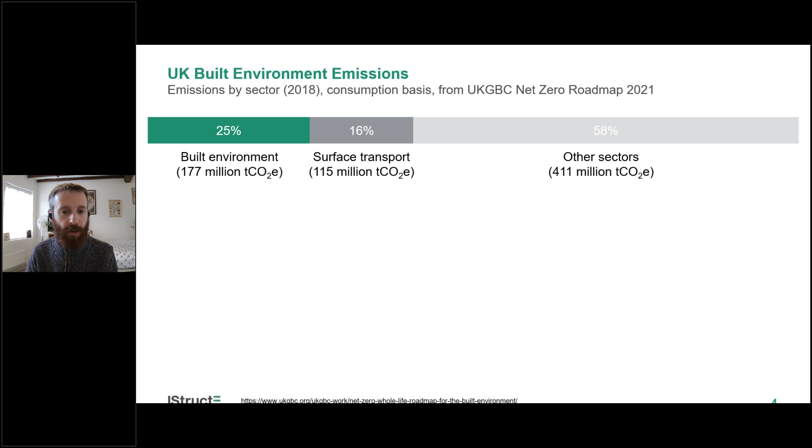So it's about 180 million tonnes of carbon per year in the UK due to the built environment. And that gets split down into a couple of things. We have this term whole life carbon, which is used to describe the total emissions throughout the entire life of a building or an asset, everything from constructing it in the first place through its life cycle, operating it, maintaining it, and so on. And at the end of life, when we come to demolish or deconstruct it. And whole life carbon is roughly split into two parts.

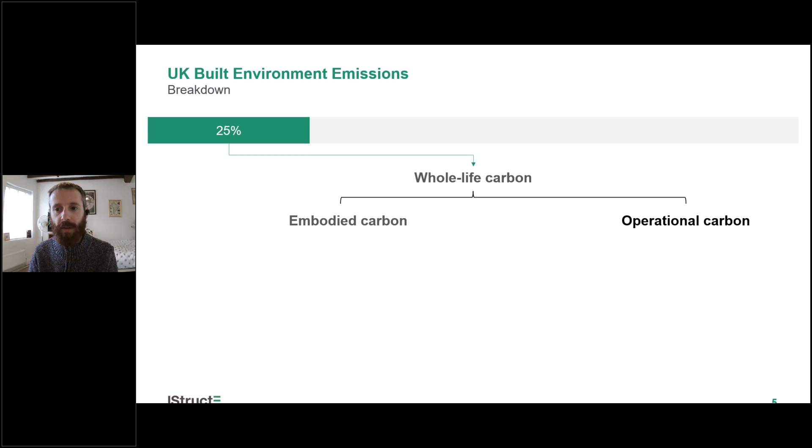So we have embodied carbon, which is obviously the focus of this talk, and then we have this other half, which is operational carbon, which has been the focus of a lot of conversations around carbon in the past. Now, the general rule of thumb is embodied carbon is anything that you can touch, and operational carbon is anything that is related to anything that you can turn on or off.

So the chair that you're sat on right now, there are embodied carbon emissions associated with that chair. When the various materials were produced, there were greenhouse gas emissions emitted at that point in time. It was probably transported at some point, maybe between different factories, with the padding being made somewhere and then transported somewhere else to be assembled into a full chair, and then eventually transported to the position that you're sat in right now. There are emissions related to all of that.

There's some maintenance that goes on through its life. Maybe less obvious with a chair, but if you take the window closest to you, that window might stay there for a long time, but might need certain parts replacing over its life cycle. And then at the end of life of either of those things, there are emissions from taking that away. And we use the term embodied carbon because effectively that chair or that window is the embodiment of those emissions.

So it's not embedded, because there's no carbon dioxide embedded within it. These are emissions that were emitted during its construction and so on, but it's the embodiment, so we have embodied carbon. And then operational carbon is the part that's left. And like I said, that's been the focus of the conversation for quite a long time now.

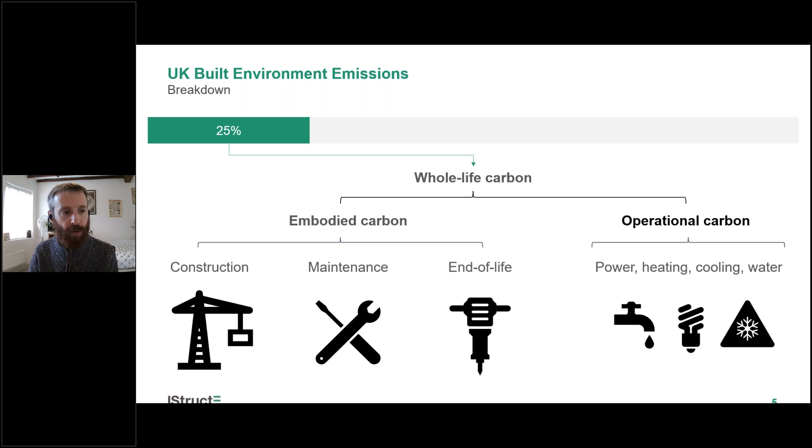In the UK, for a typical mid-rise residential block, an office, or a school that meets current building regulations, the numbers stack up roughly in these sorts of proportions. About a third of the whole life carbon emissions of a building such as that will be due to the embodied carbon, and two thirds will be the operational carbon.

And it just so happens that if you look at the UK as a whole, you get similar numbers. Out of our built environment emissions in this country, about a third are due to constructing new buildings, new stuff, and two thirds are on heating and powering our existing building stock. So it's the same rule of thumb, one third, two thirds. But that's all to do with what's typical today.

And of course, where things are going looks more like this second graph. We've got a huge drive towards decarbonising our electricity grid in the UK. We've got regulation meaning that we're going to move away from gas pretty quickly. We've already got buildings being built with air source heat pumps instead, so electric only heating. And as we design buildings that are low energy, and we see a lot of exemplars of these out there at the moment, all of this squeezes the operational carbon piece, but it doesn't do very much to the embodied carbon side of things.

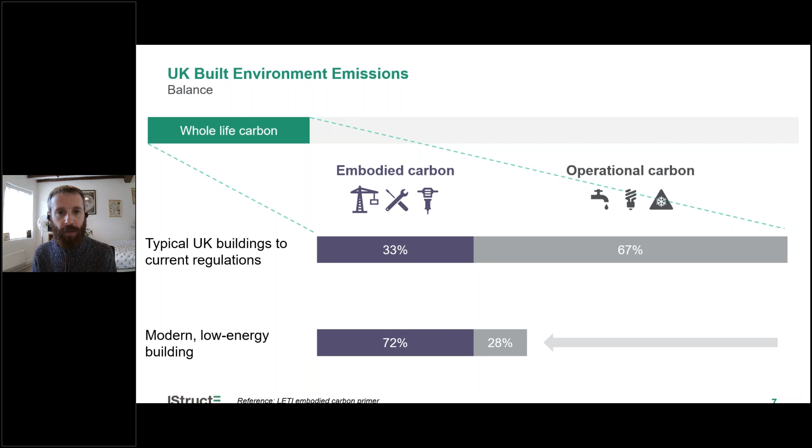The decarbonisation of the grid is the exception to that, and it does make a bit of a difference to embodied carbon, but the biggest offenders in terms of embodied carbon have other emissions that have nothing to do with electricity. When you make concrete, there's a chemical reaction, and that's actually about half of the emissions due to concrete. So we're moving towards a world where we have a much bigger problem with the embodied carbon piece than what's left with the operational carbon piece.

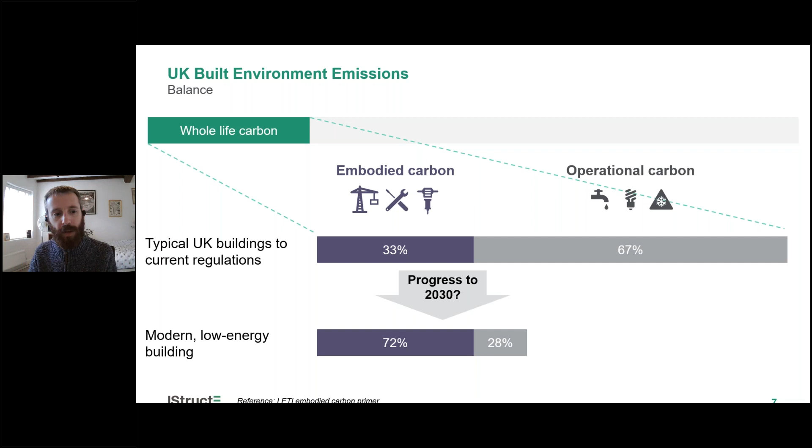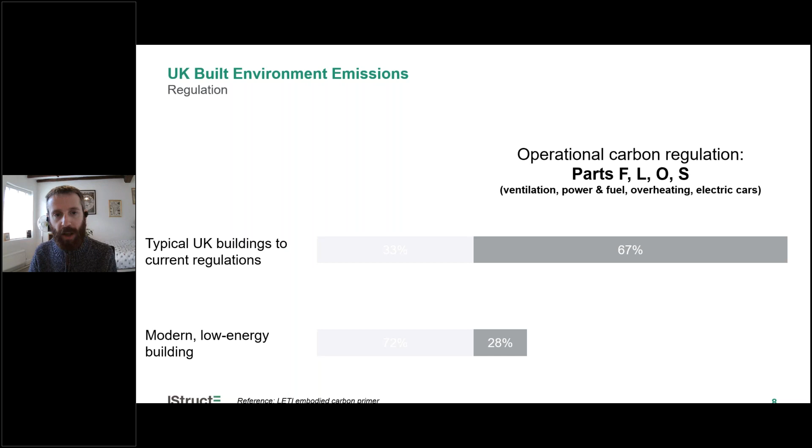At the moment, we expect that by the end of this decade, by 2030, we would hope to be in the position shown at the bottom, at least in terms of the grey bar, with operational carbon. The point of all of this is that at the moment we have all these different parts of the building regulations dealing with operational carbon and operational energy use. This is what's helping to drive some of those efficiencies. And we have nothing at all to deal with the other side of the graph, the embodied carbon. So it's completely unregulated, and it's currently the minority, although it's still a pretty big chunk.

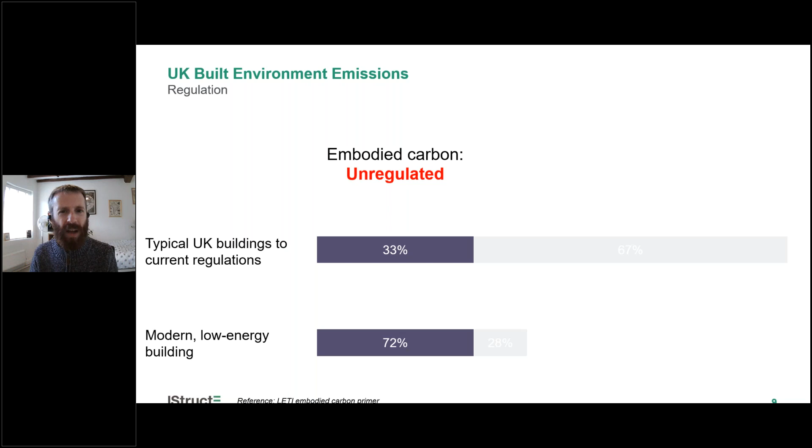But by the end of this decade, it means that the majority of the emissions on new buildings will be unregulated. You can put as much concrete in the ground as you want. You can dig a hole to the center of the earth and fill it with concrete to build your foundations for your project. And as long as it doesn't cut through any underground tubes or anything like that, that would be fine. That's clearly not quite okay. Hence me talking to you today.

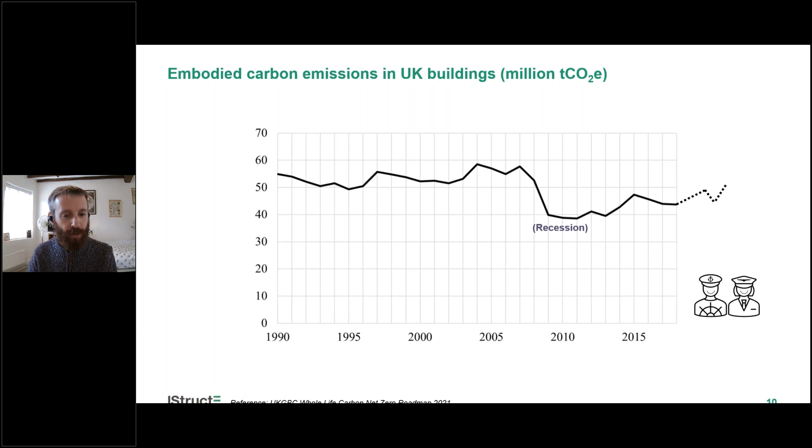So we're around the 50 million tonnes of carbon mark in the UK. And for comparison, that's more than aviation and shipping combined in this country. So we've got these regulations out there and these policy ideas behind aviation, for example. We've got the snappily named Jet Zero, but we have nothing to do with this 50 million tonne of carbon elephant in the room called embodied carbon.

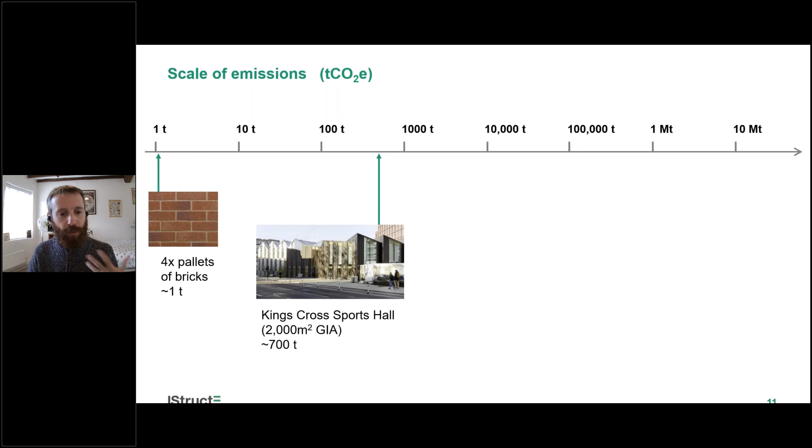The other thing I'd like to share in terms of numbers is just to talk through the scale of emissions for a few different things. I'm not going to talk through all of these, but I think it's worth sharing these examples one at a time to give you a feeling of what the numbers look like at different scales. When you're down at the materials level, you're talking in terms of tons of carbon. Once you're up at a building level, it's between the hundreds and maybe tens of thousands of tons, depending on the size. A domestic family property is obviously going to be less than 100 tons.

But by the time you get to a city centre flagship development, you're going to be into the tens of thousands, if not more. You have whole developers' portfolios that get you into the hundreds of thousands of tons, and probably the biggest buildings out there are in the hundreds of thousands of tons, if not more. In fact, from a rough back of fag packet calc, the Burj Khalifa is probably beyond 500,000 tons of carbon. And then at the top end of this scale, you've got the UK. So this is just to give you a sort of scale of where that all fits.

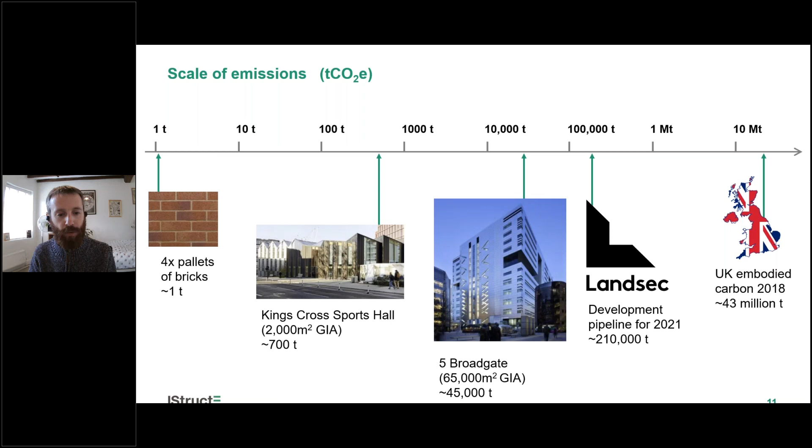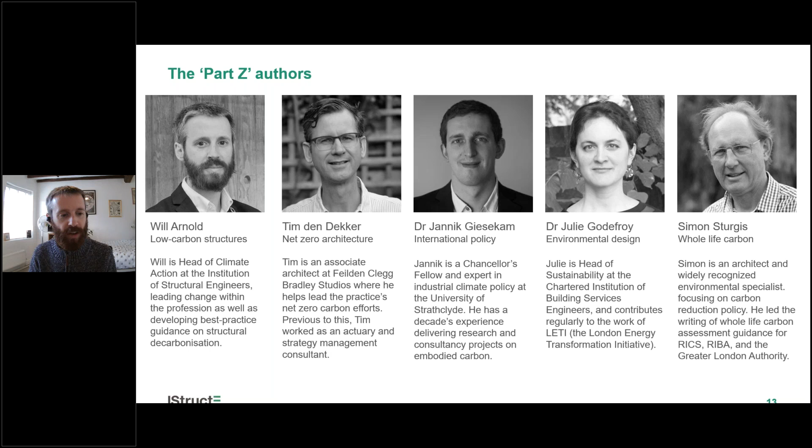So our plan was that if you want to get the industry talking about regulating embodied carbon, then maybe it'd be useful to give a working prototype of what it looks like to allow people to start to unpick it and ask questions and comments. Obviously, the building regs is broken down into parts A, B, C, D, E, etc. Part L is for energy. We were going to name it Part O, but then we discovered that was already being worked on by the Department for Levelling Up, so we just skipped to the end of the alphabet.

So it's called Part Z purely for simplicity, that no one else is going to ride to Part Z in the near term, we hope. And in the same way that the other parts have this sort of wording in Schedule 1 of the regulations, we wrote out the Part Z wording as it would sit in the regulation in our view. And it's got these two parts.

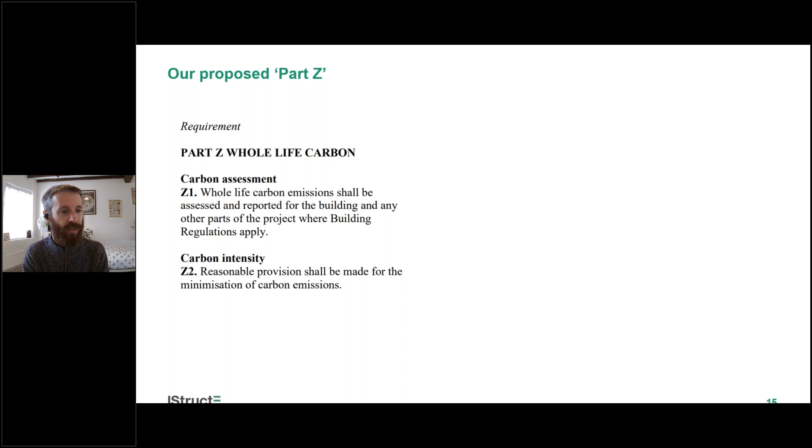So Part Z1 is basically to say that whole life carbon emissions need to be assessed and reported for the building and for any other parts of the project that the building regs apply. And then Part 2, and the wording's a bit funny, but that's because it's aligned with the Part L wording on this. Part 2 basically says that there needs to be limits on those carbon emissions, on the embodied carbon emissions. So the two parts, just to recap that, the first bit is to talk about assessing and reporting, and the second part is about limiting.

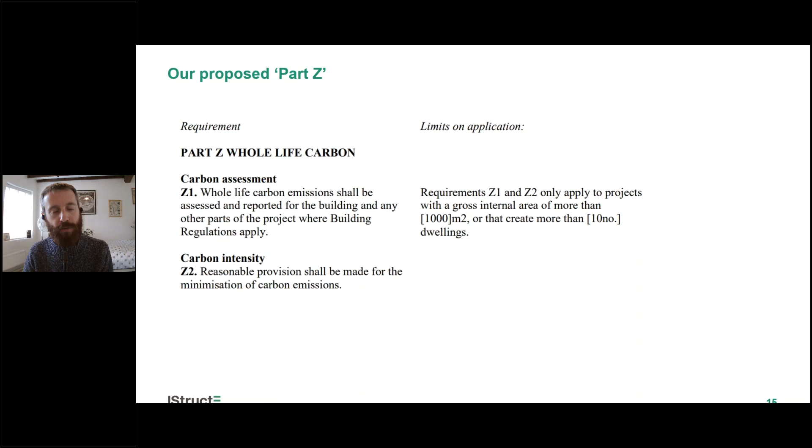And I'll show you in a second, but they, in our view, are two different things and would come in at two different times. We've also suggested in Part Z that this would only apply to major projects. So projects with a GIA of more than 1,000 square meters, or that create more than 10 dwellings. So if you're working on a small housing development, or just a single property, or just a scout hall or something like that, this wouldn't apply to you in the first instance. And it's only applying on the scale of things where you're getting into the territory where you're doing the more onerous demands of Part L, the Future Homes Standard, and so on and so forth.

And then our suggestion was that the first part of Part Z, the reporting side of things, kicks in as of next year. You can see obviously that first date's getting quite close now, and we will need to update our proposal at some point soon because it doesn't seem that's going to happen. And we've suggested that housing follows suit maybe a couple of years later. And the only reason for that is that in our experience as authors, the non-domestic market is probably slightly ahead of the curve on this topic.

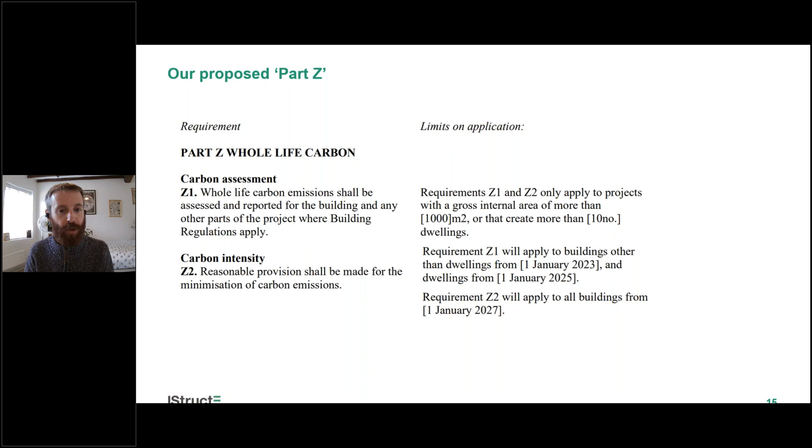And we then said you'd collect data for a couple of years, use it to assess where you think benchmarks should sit, and you'd then set the limits based on that a couple of years later. So it wouldn't be until 2027 that limits would come in this proposal. And to supplement all of that, in the way that all parts do, we then pulled together the proposed document. It's not an approved document, it's not been approved yet, but our industry proposed document, and that would explain to you how to go about doing this.

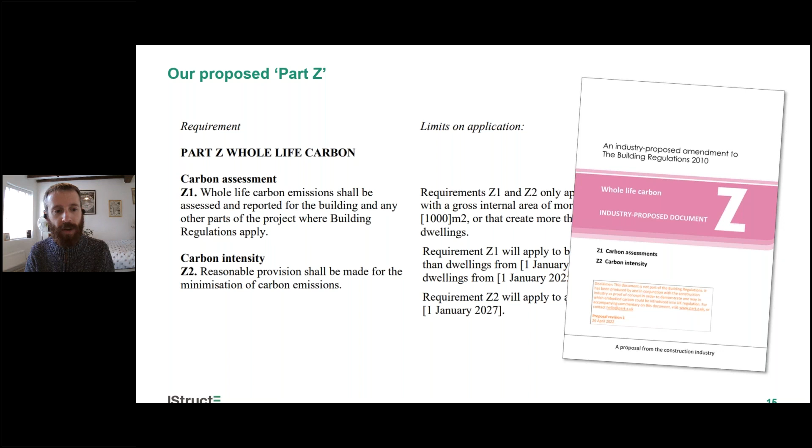I'm not going to open that on this screen. It's only got 7 pages to it. It takes about 5 minutes to read. It would be the shortest approved document out there if it was approved. But you can go onto our website, part-z.uk, and you can download it and have a look. And there's some commentary written alongside it so you can understand what we're doing.

But in essence, what it tells you to do is to follow the RICS professional statements, which is more or less the de facto standard on this topic in the UK anyway. And it just draws out some of those pieces around size limitations and dates and things like that. It's fairly straightforward. And it doesn't have any carbon limits in it at the moment, because like we've said, you need to collect the data first before you can decide where to set those limits.

The point of all of this is that there needs to be a clear policy ask from government that sends this sort of market signal. So in the same way that a few years ago, the government said we are not going to be allowing the sale of petrol and diesel cars in this country at all from 2035 and hybrid only from 2030, that sent a clear message to the market. And as a result of that, every advert you see on TV today for a car will have an electric engine in it because the industry has responded. So what we're asking for with this is similar, basically give clarity on what's coming and the industry will respond.

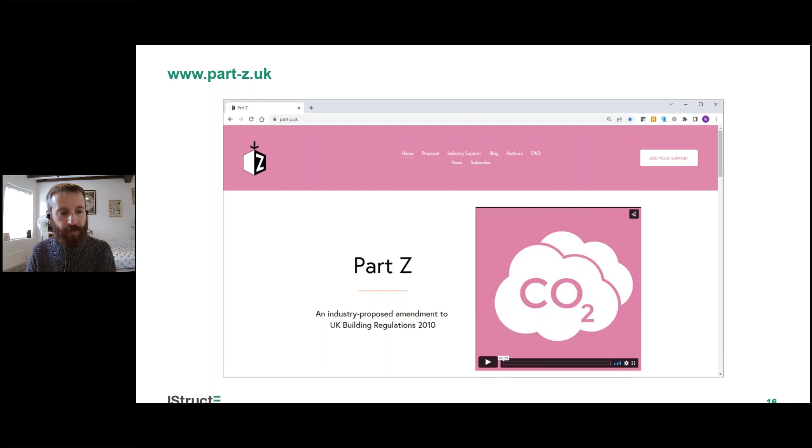So that kind of takes me on to the final piece of this, and that's just to reflect on some of the other things happening around the industry and some of the supporting reasons for why this is needed now. And the first thing to say on this is that the support that we've had for Part Z has been huge. This is a list of some of the names that have written in support of embodied carbon regulations.

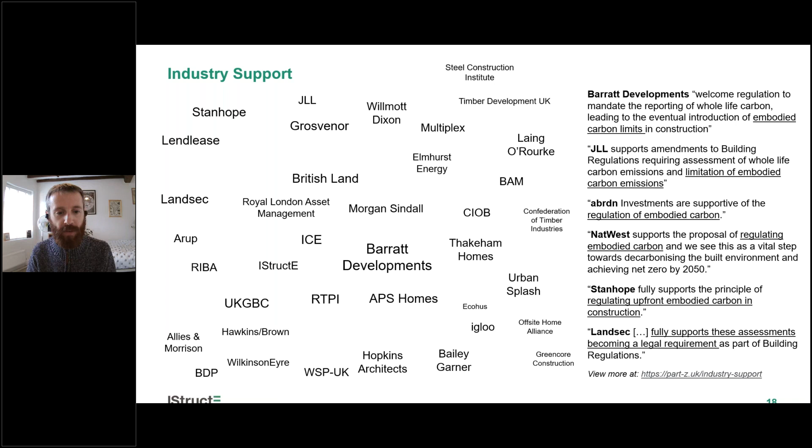So we got in touch with some of these firms early on and said, we're going to put this Part Z proposal out there. We don't need your support of the proposal itself, but we would like to know whether or not you support the principle of embodied carbon regulation. And all of these firms and more have written in support of that, and they're on our website too.

And you can see here some of the things that have been said by some pretty big household names, right? So Barratt Developments and JLL and NatWest and Stanhope and Landsec are pretty well known in this industry and beyond. And we're now up to nearly 200 of these statements, which is a pretty significant proportion of the building industry.

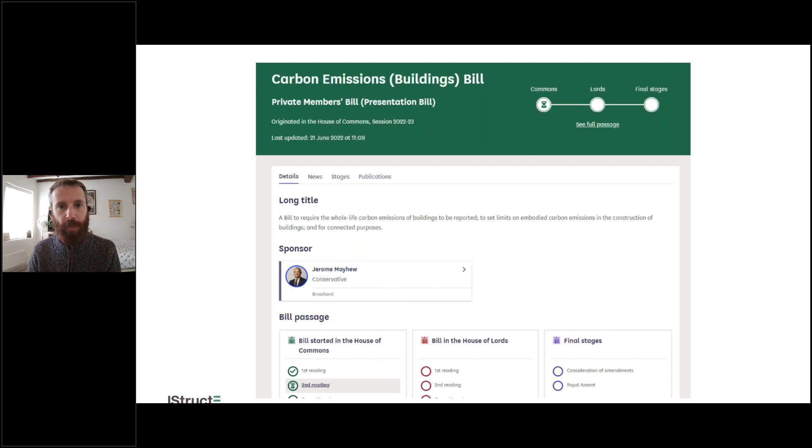So actually on this Friday of this week, Jerome Mayhew is going to be putting forward his private members bill, which is a carbon emissions buildings bill, which effectively asks for the same things as Part Z. We've been working with him on the details of that bill, and he's going to be presenting that in Parliament on its second reading. So that's the sort of formal debate of this. So this is the first time ever that this topic has got to this point in the Commons, and it's quite significant.

Alongside all of that, industry is not waiting around for this to happen. And some of you may be aware of the UK Net Zero Carbon Buildings Standard. This is a standard that's being written by these organisations at the bottom of the screen, with the help of about 300 volunteers from across industry. And effectively what this standard will do when it's launched is it will give a voluntary standard that clients can put into their briefs for their design teams and so on, that says this is how we want you to define net zero for the building that you're going to produce for us.

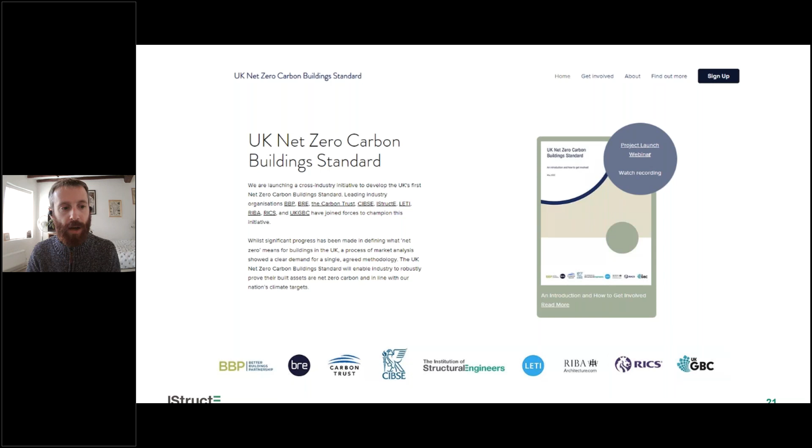And that will include, in the same way that Part Z asks for it, the requirement to report embodied carbon alongside operational, and it will set limits on that. And that will be launched in the middle of next year, so look out for that. So the industry is not hanging around. And then even when you go beyond that sort of core of the industry, you look at the house building industry, and you've got the Future Homes Hub. They're working up roadmaps, route maps, and sort of delivery plans for the rest of this decade.

That includes nods towards things such as embodied carbon limits and embodied carbon regulation, and actually even within the UK government's construction playbook, which is the sort of requirements for public projects, even that now requires whole life carbon reporting on projects.

The thing, of course, that's missing is any sort of consistency of how you go about reporting it, which is causing headaches and means that we're wasting time and money by doing different things on different projects. Hence the need for something like Part Z. But the point is that even our government is aligned in this and is going in that direction. And to me, this is all a case of when now rather than if.

So you see from the precedent, you see from the industry readiness, the industry asks, the fact that we've got all the tools we need. This will be coming in within years, hopefully, and hopefully from talking at events like this, it gives the industry a chance to learn about Part Z and what's coming in. Hopefully you feel a bit more prepared for it when it does come as a result.